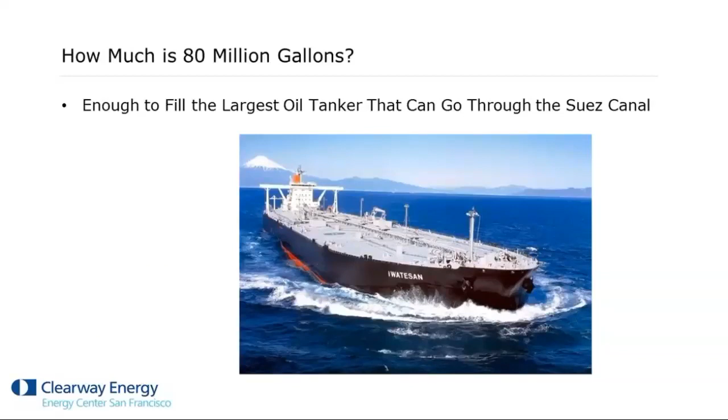So first off, Rob introduced this as how do you save 80 million gallons? Well, before we get into the how, we should ask how much is 80 million gallons? One way of thinking of it is if you take the largest ocean-going oil tanker that fits through the Suez Canal, that's about 50 to 80 million gallons. If you had a bunch of 55-gallon drums and you laid them end to end, that would be about a 1,000-mile pipeline, and that's about 80 million gallons.

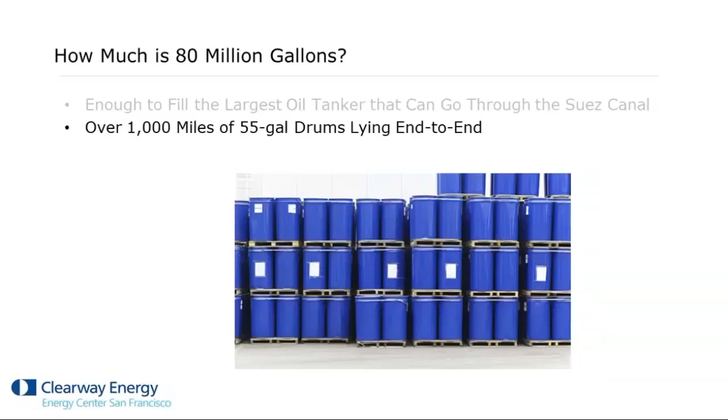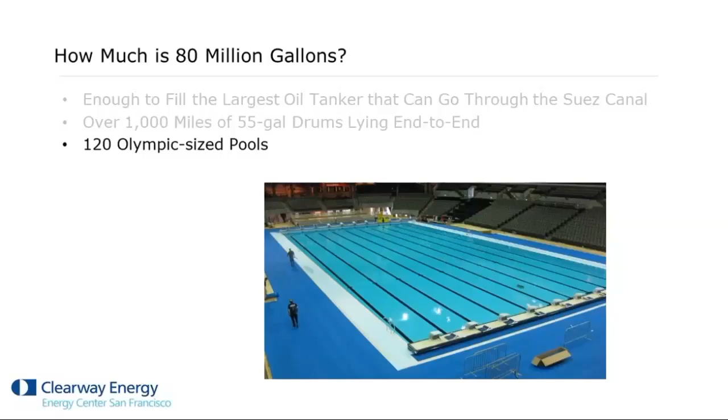And for the more athletically inclined, that'd be about 120 Olympic-sized pools. So no matter how you slice it, 80 million gallons is a lot of water, and it's especially a lot of water here in San Francisco. If we look at our total annual water usage, we're a once-through steam system, we're right at about 100 million gallons a year. So 80 million gallons is a large percentage of our total water usage.

So as we look at the setup, what is the nexus of how this project came together? It starts with a local subway station, about 800 feet from our existing plant. That subway station has had a constant intrusion of groundwater for the last 40 years. The subway is about 60 feet below street level. About 30 million gallons comes in, they collect it in a cistern, and they've pumped it to sewer for 40 years.

As most of you have heard, over the last 5 years California has been drought land. Recently in news stories it's come up that this subway entity is pumping all this water to sewer and it's being wasted. We got involved through my distribution manager, who was having problems with manholes flooding from below. When he met with the subway people, he found out they were waterproofing their tunnels, which kept water out of the tunnels but backed it up in our manholes. That's really the genesis of the project.

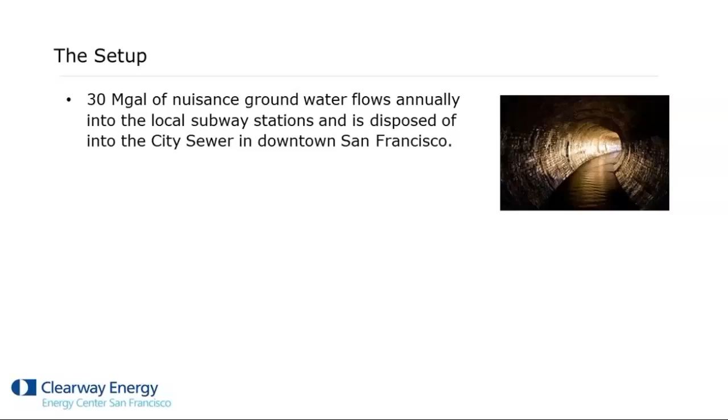Looking at district energy in San Francisco, at 100 million gallons a year we're actually one of the largest water users in the city. As sustainability becomes a bigger thing, we felt there was a target growing on our back with our high water usage, and we needed to address that. In addition, the costs of that water have gone up a lot over the last 15 years.

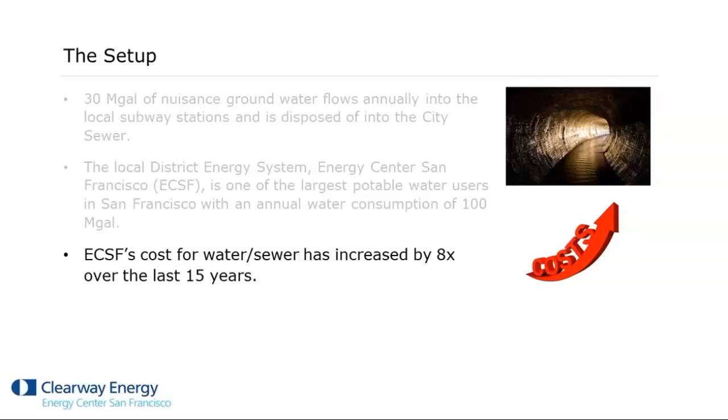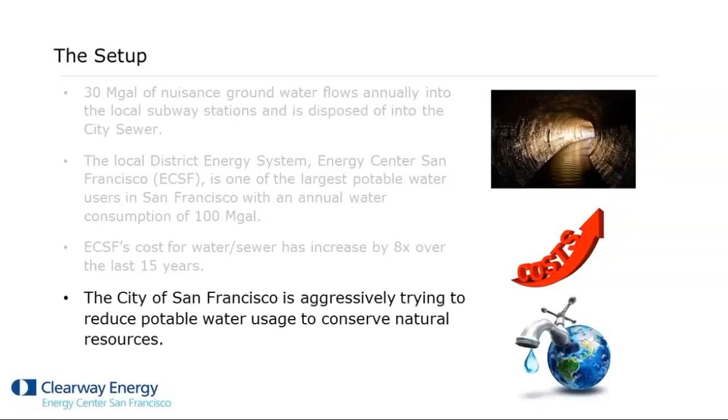The city of San Francisco issued a $3.6 billion bond to rebuild the water system and make it seismically stronger, and that cost gets passed on to the rates. About 14 years ago my water and sewer costs were $250,000 a year, and last year they were $2.2 million, basically 8 times. The city has also been looking for ways to do water conservation and water recovery, and this project met that wicket as well.

This diagram shows 2 things. The yellow at the top is our water usage over time. We've been adding condensate return and getting more efficient, so water use has generally been trending down. But after they passed that bond in 2003, the blue bars, our water and sewer cost, have gone up to about $2.2 million last year. So this presented the economic driver to make water recovery work, because as you'll see in this presentation, water recovery and water processing is not cheap.

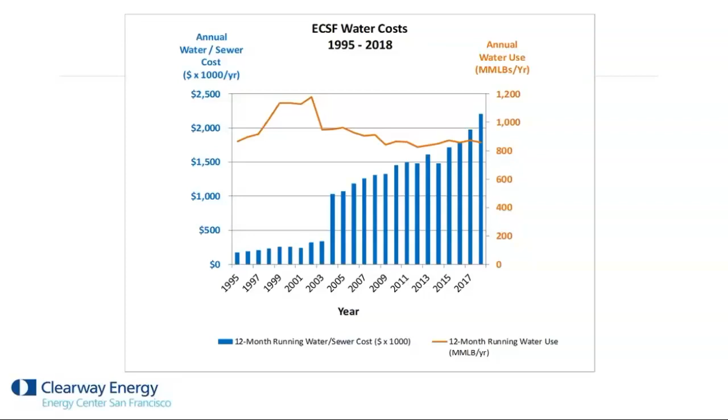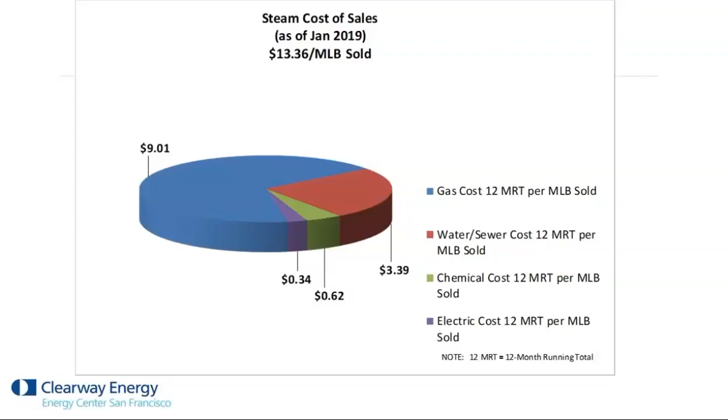One other aspect about this graph that I should point out is that of that red, water plus sewer, the sewer is about 2/3, the water is about 1/3. And the reason I point that out is that'll be critical as we talk later about how we decided on technologies and things like that. So sewer cost is a huge cost here in San Francisco.

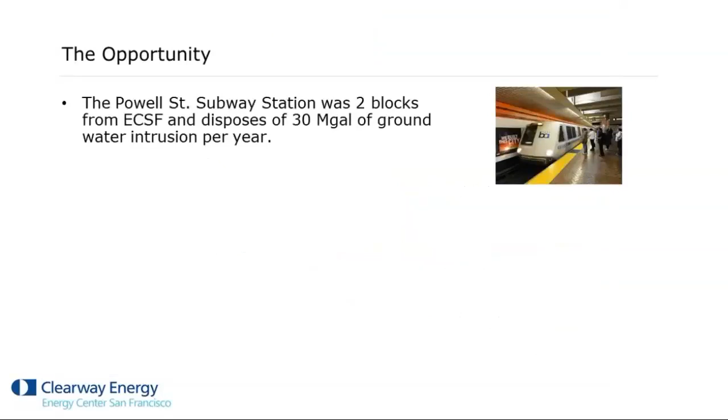So the opportunity, the Powell Street Station is the one I talked about where all this water is available, and it's about 2 blocks from us, about 800 feet. The San Francisco Public Utility Commission, they're the ones who run the water and sewer system. They were actually offering grants to do water reuse projects of almost any size, and they were offering up to $500,000 for a large water reuse project.

And then the big question in this project, was there a way where a private company like Clearway Energy could work with a public entity, and actually in this case it's 2 public entities. The public entity, the City of San Francisco Water Sewer System, and also the state agency which runs the subway. Is there a way to bring all 3 of those entities together for a project that would actually work and benefit everybody?

So here's the concept. The concept is that Clearway would engage the San Francisco Public Utilities Commission, we'd engage the subway entity, and we would do a project collaboration process to say, hey, there's wins for everybody in this. The idea would be to recover the 30 million gallons of water from the subway station and figure out a way to bring that to our plant about 800 feet away.

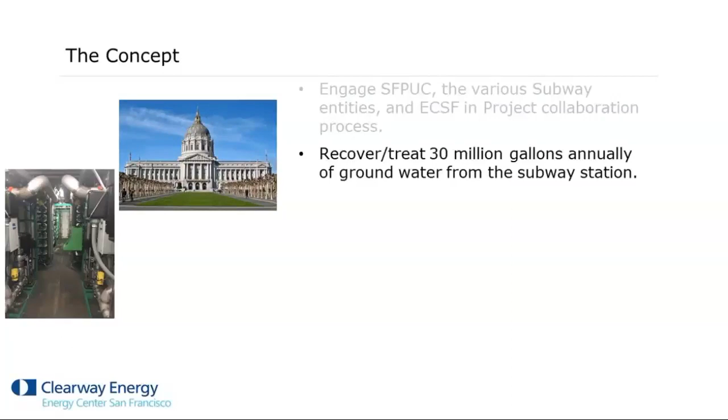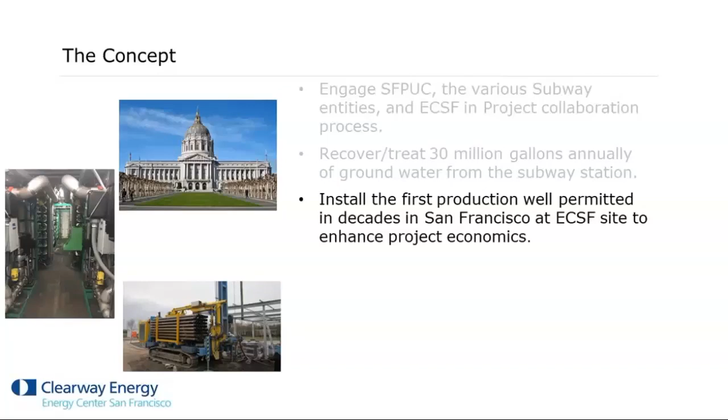The other thought that came along as we developed the project concept was, well, if you can recover groundwater intrusion to a subway station and process that for use in boilers, what about the idea of doing a well? Now, this is kind of a radical idea because San Francisco hasn't permitted a production well in over 40 years. So there's nobody within the various agencies of the city that actually knows how to do that. And so that's been an interesting addition to the project, adding a well.

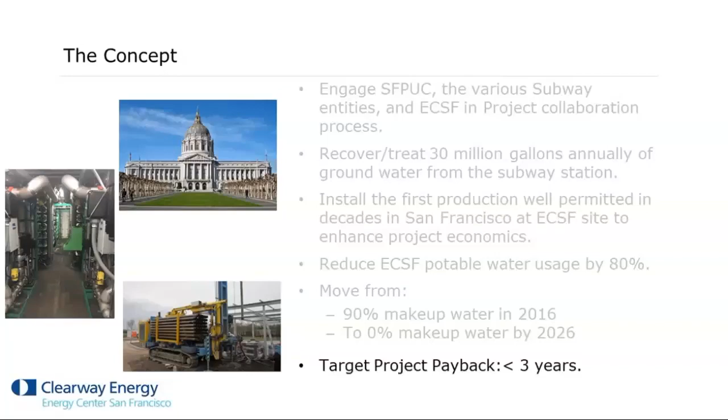But the goal was this, essentially reduce our potable water usage by 80%. So if we say in 2016 we make up 90% of our water for our plant, the other 10% we have some condensate return that comes in and some other water recovery going on. But the goal is that by 2026, in a decade, we could be to a point where we use 0 makeup water from the city. And, of course, the folks at corporate would really like a project that actually had a payback, so we targeted a project that would pay back in 3 years.

So just a quick overview of where the project is. So down in lower left, here's where the subway station is. This is the corner of 5th and Market. Bloomingdale's to the left. San Francisco Mint up here. This is a major intersection of downtown San Francisco. And what you see in this outline in orange is where we ran the pipeline from the subway station up 5th Street and then down this alley to our plant. And I think the total run there is 800 feet as the crow flies, turns out to be about a 1,000-foot pipeline. This part was actually fairly easy because we're already equipped to run piping in San Francisco.

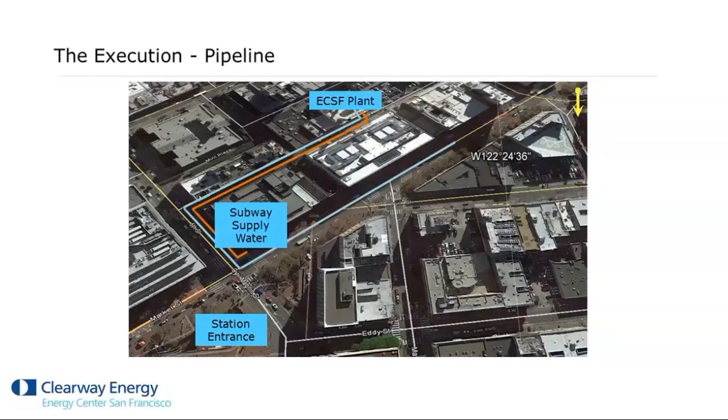Also, the thing that made this easy is that the current subway station has their cistern 60 or 70 feet below street level, and they already have pumps installed in that cistern. What the pumps do is they pump the water almost straight up vertically, and then it turns right and goes into the sewer. So they already bring this water up out of the station, and really what we had to do was just tie into the pipe that goes to the sewer. What we ended up doing was putting in a three-way valve so that the water could be either directed to the sewer or directed to our plant.

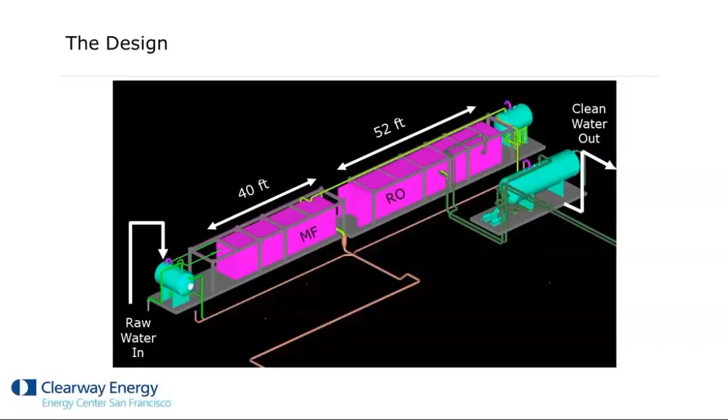And this is a longer, kind of a stretch cargo container, as it were, about 52 feet long. That's where the real magic happens. That's where the water is really cleaned up to better than boiler standards. And then this large tank over on the right is where that water is collected, and then we have a pumping system that takes that out to the plant.

The other thing that made it critical was most of the heavy components in terms of water treatment, both microfiltration and the RO systems, were modular design. Those were built off-site by the vendors, and then they were brought on site and we used a crane to put them in place.

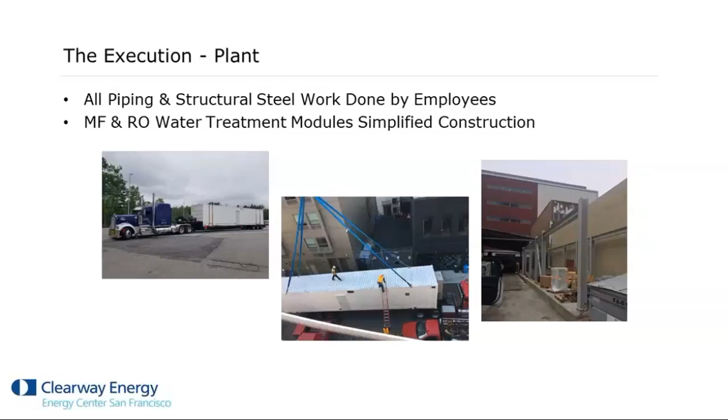So that really minimized the on-site time and cost of doing construction in San Francisco. It's very expensive to build here, so being able to bring this equipment in modularly was a really key element of the project, key part of the success.

When we look at the results, what did we end up with? So the total project cost for this, and this is just for, I'll call it the BART water system or the subway system, it's about $3.5 million. We expect to get a total annual savings of about $1 million a year, so that'll give us our 3+ year payback. This breakdown of the savings is about $800,000 a year on the water sewer savings.

And then because we're using reverse osmosis technology, essentially we're ending up with a lot cleaner water going to our plant than we've ever had before, meaning that most of the alkalinity is stripped out, and our system uses a lot of amines to neutralize the carbonic acid created from the alkalinity. And with the reverse osmosis, we're going to have a lot less alkalinity going into the boilers, and so our amine usage is actually going to go down. So we'll actually have a lot of chemical savings on the back end.

We were approved by the SFPUC for the full $500,000 grant. They were very excited about this project because they had water saving goals going up through 2025, and when we brought them this project, essentially in one step, we would get them to their 2025 water savings goal. And so they approved us for the full $500,000 grant, which was the largest they could offer.

I talked about a well a little earlier. Essentially the idea was, hey, if you're doing this cleanup on this groundwater, why not add a well? We investigated that. We did some geotechnical assessments, and lo and behold, it looked like there was actually well water available. When we installed it, it looks like we have a well that produces about 200 gallons per minute, and it really was only about a $250,000 add on the $3.5 million project.

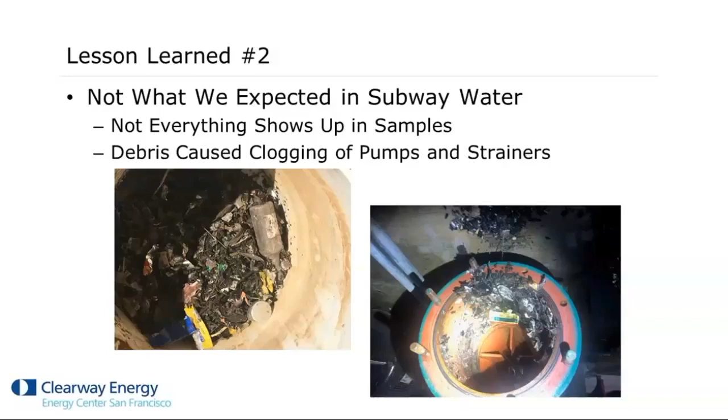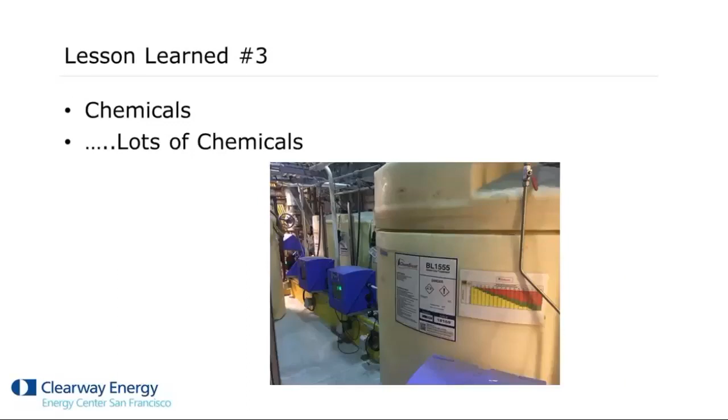Lesson learned number 3, chemicals. Lots of chemicals. Water treatment takes lots of chemicals. It's not just straight filtration, because to make the filtration work, it requires a low pH here, a high pH there, chlorine to get rid of biologics, and a lot of things. So here's just a quick picture of all of these new chemical tanks that were added to our plant as part of this process.

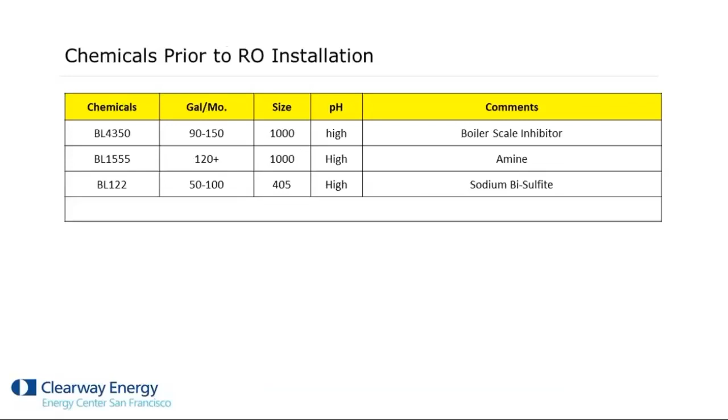To put it in list form, here's the chemicals we used to run the plant with before we had the reverse osmosis. These are 3 boiler chemicals that probably everybody is familiar with. Well, here's our chemical list after having the reverse osmosis systems, and you can see there's a whole batch of new chemicals required. And this makes the system run good and right, but you do have to allow for provision of a lot more chemical treatment, a lot more chemical deliveries.

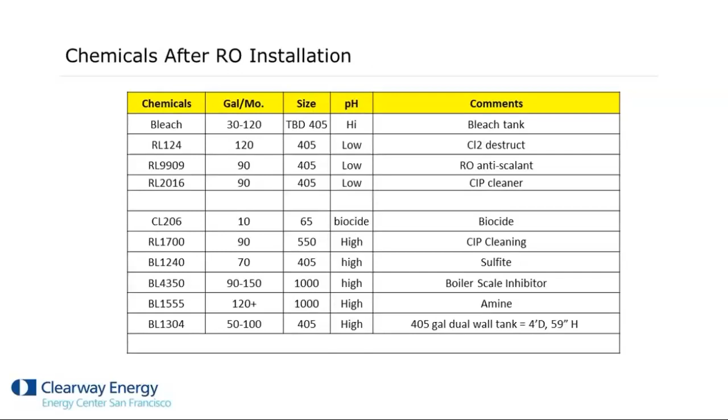Lesson learned number 4, chemistry is different. So not just chemicals, but the actual water chemistry is different. So we talked earlier about what happens when you have demin water going through carbon steel piping. We already know that. You get a lot of corrosion. Even with a neutral pH of 7, you still get a lot of corrosion.

But the other thing is, remember back on the process flow diagram, I talked about direct contact. So our water used to go through softeners, and then it would go into the direct contact system. It would spray from above. The flue gas would come up and mix with it, give up a lot of heat, and the water would leave at about 150 degrees, and all was good.

Well, what we found out is that the chemistry inside direct contact changed when we started introducing demin water. And essentially what happens is with softener water going into the direct contact, there was alkalinity still part of the water. Well, the alkalinity buffered or prevented a lot of CO2 from being absorbed. It was kind of an equilibrium equation, as it were.

Well, once we run water through there that's demin, it has no alkalinity in it, and now running through the direct contact system, it has a high affinity to absorb carbon dioxide from the flue gas. And so that was a change. And so now we were seeing downstream pH problems going into the deaerator and some other places.

And so we think we're getting into the process where we're going to convert the direct contact system to an indirect contact system and basically keep the demin water separate from the flue gas directly and prevent the CO2 absorption.

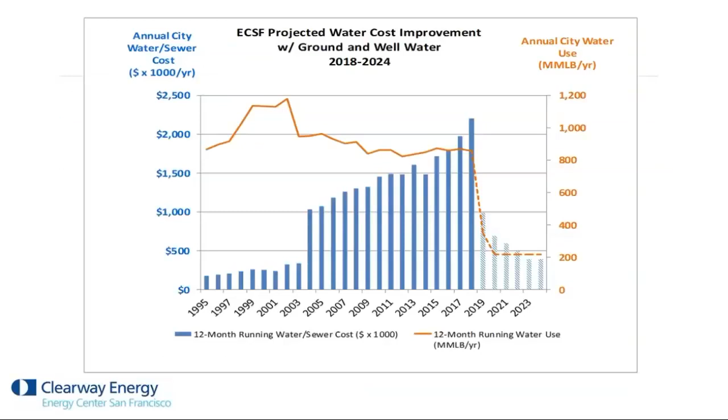And one of the things we did in the design process was we initially designed this system smaller, meaning it was just going to treat the subway water plus maybe well water, and we were just going to mix it with city water. And when we looked at the operational dynamics, that was going to be hard because in the middle of the night, all the plant water would be subway water, and it would be very pure. And then when the morning peak comes, we'd be blending a lot more city water.

And what we said is, that's going to make a headache of a plant because you're going to have really pure water in the middle of the night and then blended water in the middle of the day, and then in the afternoon you're going to have something in between. And you can imagine trying to adjust boiler blowdown and things like that with this constantly swinging water quality. So we took a pull back.

We asked Clearway, we said we need more money for the project because we want to increase the size of the filtration so that it treats all the water. So now in our plant, all the water, whether it's subway, well, or even city water, it all goes through the reverse osmosis system. And what that does is it gives the plant a steady, high-quality water that they can actually operate the plant to. And hopefully that answers that question.

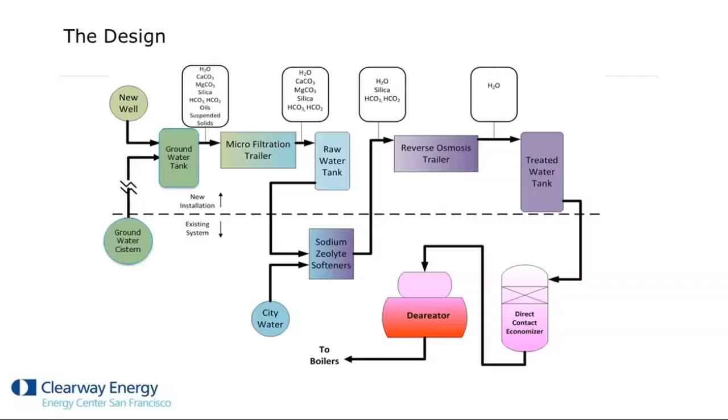One of the really exciting things for us that we didn't try to quantify for corporate, because the water and sewer savings were already so good, is this. With an RO system, you essentially remove all the alkalinity from your makeup water, which means you don't have any CO2 going out with your steam. You have almost no carbonic acid in your pipelines. What that means to our 100-year-old steam system is we're going to have a lot less corrosion in the system.

So in a typical year, we repair 6 major leaks in our 10 miles of pipeline. And we're expecting, just due to the better pH treatment of the system, that number to drop from 6 maybe to 5, 4, or even 3.

That's hundreds of thousands of dollars a year of maintenance that we'll be able to forego, because the distribution system is essentially being treated a lot better than it was with just simple softeners. So we didn't quantify it economically, but we think that may actually be the biggest win for us as a business, that the infrastructure of the distribution piping is now going to last longer.

Thanks a lot, Gordon. We're nearing 4:00, so is there any advice that you would give to our listeners as to how to triangulate a project like this? It sounds simple now that it's all up and running, and you're sorting out the final commissioning. But working with two public entities, the city and the subway, was it important to find the common ground and assess and present the mutual benefits of this project to get them to pay attention, stay attentive, be supportive, and actually provide funding?